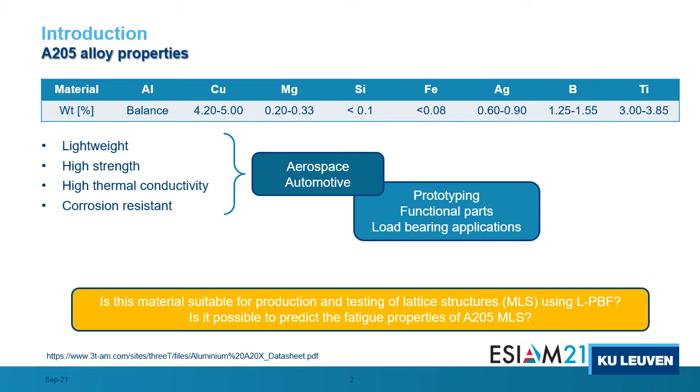For these reasons, the content of the presentation will be organized in two parts. First of all, we are going to explore the parameter optimizations for sample production of the metal lattice structures that we use in this investigation. And in a second stage, we are going to explore the fatigue life prediction and the fatigue experimental campaigns that we conducted on the coupons. At the end, we are going to wrap up with some conclusions.

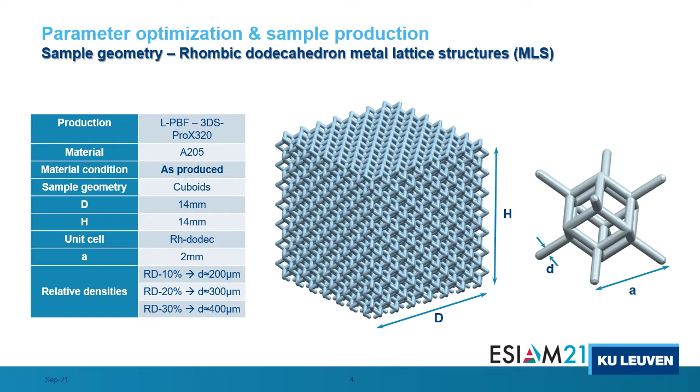The samples used in these investigations were produced on a 3D Systems Pro X 320 machine. They are composed of rhombic dodecahedron unit cells that were replicated to fill the volume of a cube of 14 millimeters of side. The rhombic dodecahedron unit cell is a bending-dominated unit cell composed of 32 struts connected by 8 nodes. We investigated 3 different relative densities, namely 10%, 20%, and 30%, by changing the strut diameters from 200 microns for 10% relative density up to 400 microns for 30%.

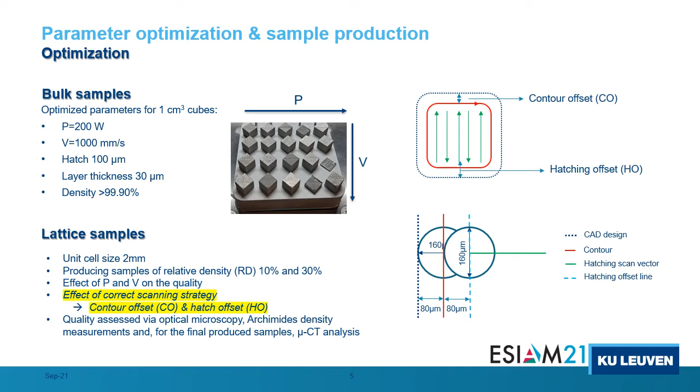The optimization process has been performed for 2 different relative densities, namely 10% and 30%. We started from the optimal parameter set for bulk coupons and we investigated the effect of the laser power and velocity on the metal lattice structure parts. Moreover, in order to produce lattice structures that are closer to the CAD geometry, 2 scanning strategy parameters were investigated, namely the contour offset and the hatch offset.

The main results of the parameter optimization process are presented in these pictures. On the left side, the first trials are presented. For these coupons, we used high laser power and velocity. The resulting quality is very poor, with severe dross formation affecting the outer surface of the struts. Moreover, looking at 30% coupons from the side, it is almost impossible to clearly distinguish a strut.

On the right side, the coupons produced with the optimal parameter set are presented. In this case, the overall quality of the parts improved with a substantial reduction of the dross formation and of the molten particles on the strut surface. However, top view and side view show different strut thickness, indicating that the struts are slightly elongated along the building direction.

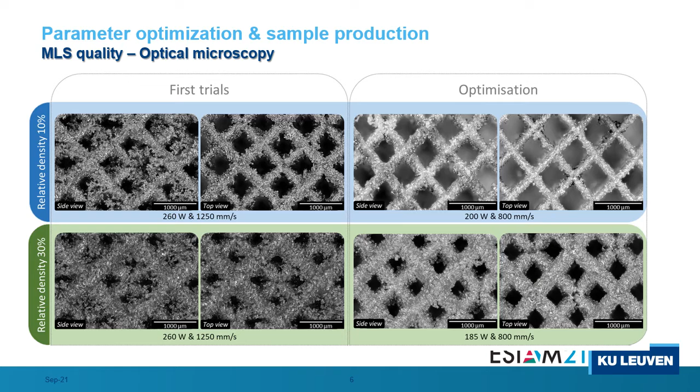The optimum parameter set presented in the table in the middle of this slide was used to produce 95 coupons with 3 different relative densities. After production, the coupons were removed from the base plate and cleaned using an ultrasonic bath.

In the bottom table, the measured relative densities are compared to the designed ones. The RD10 specimens are very close to the design geometry, but these measurements start to deviate when going to higher relative densities. This is likely due to the large effect of the partially molten particles on the RD10 structural relative density. The internal porosity of these structures is also investigated using both Archimedes and micro-CT analysis. And it can be noticed that for increasing design relative density, more and more defects are present in our structures.

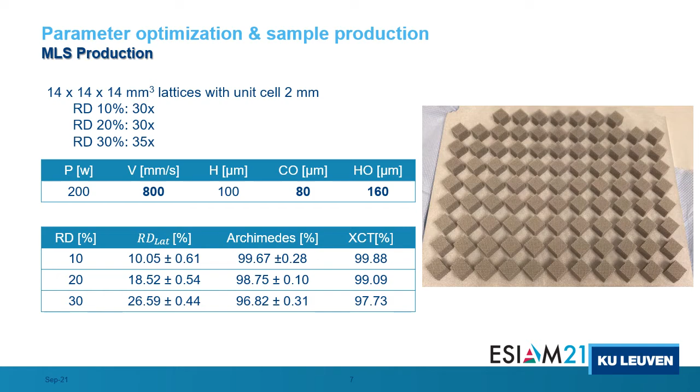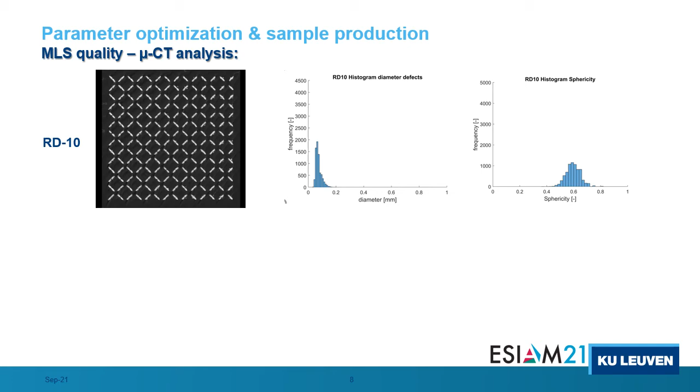The CT scans allowed us to take a closer look at the defect populations generated during the manufacturing process. For RD10 coupons, it is possible to distinguish well-defined struts with a very limited amount of internal residual porosity. These internal defects are very small and spherical, indicating that these pores consist of entrapped gas in the material.

For RD30 coupons, there are clearly larger internal defects, both at the node locations and along the struts. These defects have low sphericity, meaning that they can be classified as lack of fusion pores. The presence of these defects can be explained considering the scanning strategies adopted for RD10 and RD30 coupons.

For RD10, the scanning strategy consists only of one contour track. For RD30, the scanning strategy consists of a contour track followed by short infill tracks. These infill tracks are too short to result in a fully developed melt pool with the current parameter set, and so defects are generated.

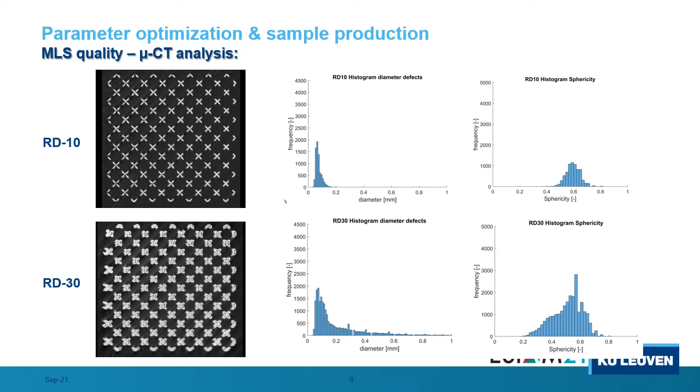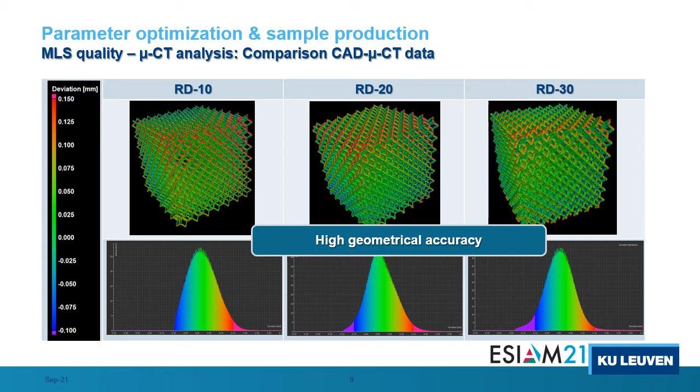Apart from the slight increase in internal porosity of RD30 coupons and these small geometrical deviations, we can conclude that we achieved our goal of building accurate, high-quality lattice structures with this aluminum alloy. Let's now move to the experimental campaign and the fatigue life prediction.

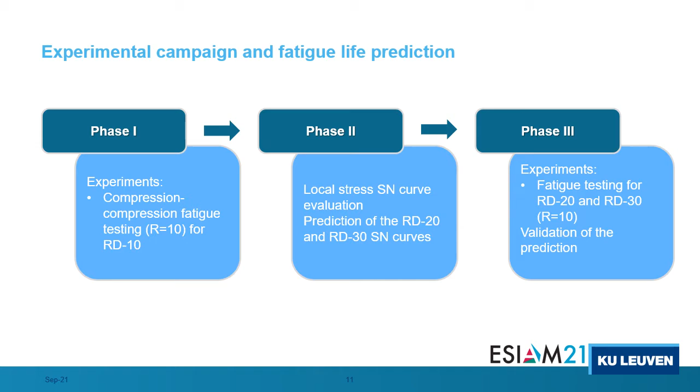The experimental campaign and fatigue life prediction consist of three phases. In the first phase, we carried out experiments on the coupons with a relative density of 10%. The experiments were compression-compression fatigue tests with an R ratio of 10. In a second phase, we extract a local SN curve that we use to predict the RD20 and RD30 SN curves. In a third phase, we carried out the same experiments on RD20 and RD30 coupons, trying to validate the predictions that we made in phase 2.

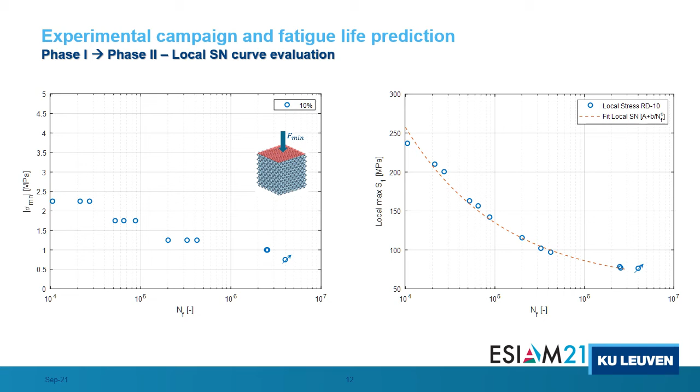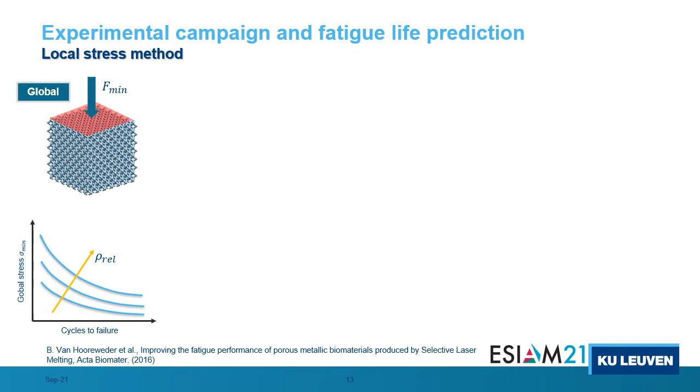In order to clarify the concept of local SN curve, it is important to introduce the local stress method. When we look at fatigue performances of metal lattice structures, we can do it from two different points of view. The global point of view treats stresses as a ratio between the forces and the cross-section of the coupons. Given the same global stress, the more the material, the higher the fatigue resistance. Therefore, SN curves are strictly related to the coupon's relative density.

But if we look locally, the external compressive stresses generate local bending and compression stresses along each strut. The struts, in this case, can be seen as clamped beams subjected to an inclined force that generates tensile and compressive stresses across the strut's cross-section. For fatigue problems, the local tensile stresses can be considered as the main driving factor for fatigue crack initiation.

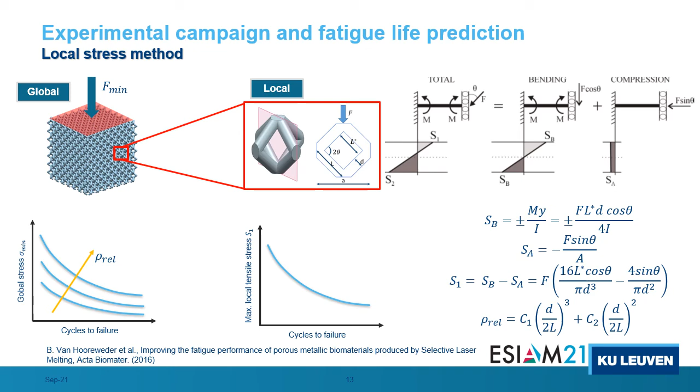Considering the Gibson-Ashby relation between the strut diameter and the metal lattice structure relative density, it is possible to obtain a single SN curve that is not influenced by the relative density, but only by the material condition and by the surface condition of the coupons.

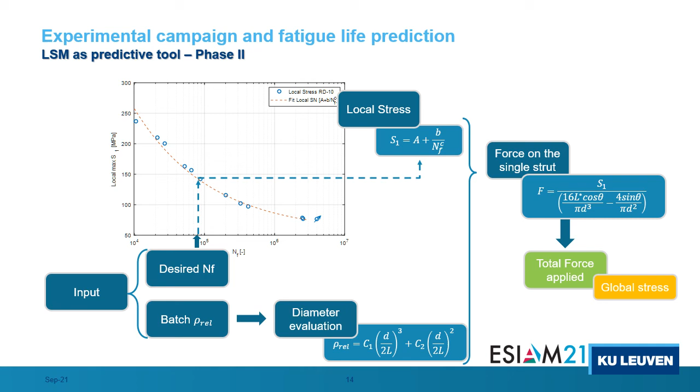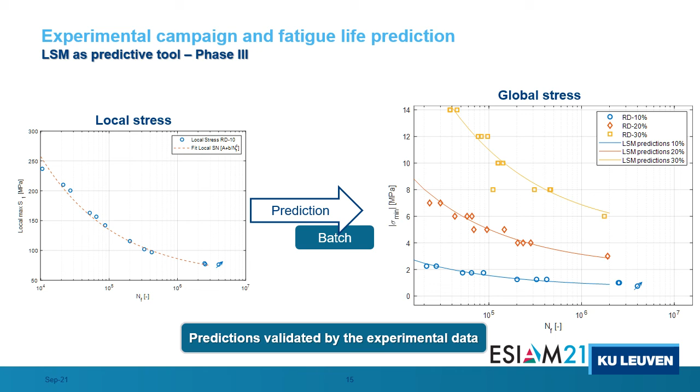Comparing the fatigue test results with the fatigue predictions, it is possible to appreciate how well the local stress approach can estimate the fatigue life of the metal lattice structures investigated in this study. This methodology could be extended to other metal lattice structures with different unit cells and produced with different materials to extract the structural fatigue life with a limited amount of coupons, saving time and money.

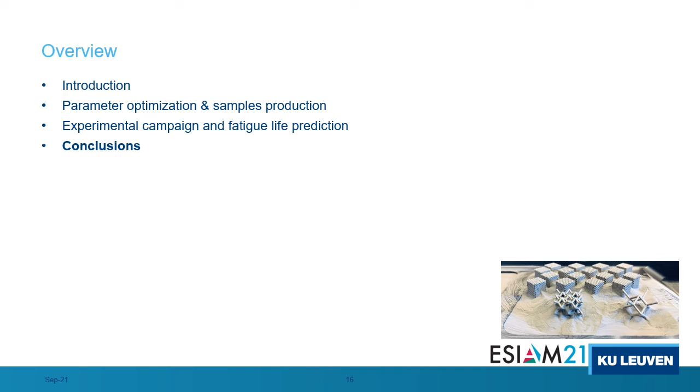To conclude this talk, it is possible to summarize the main findings of this study as follows. A quasi-optimal parameter set for production of metal lattice structures with the A205 was obtained. Although this parameter set ensured high geometrical accuracy, improvements are still required to reduce the amount of internal defects that were generated for the coupons with higher relative densities.

A methodology based on the local stress method has been proposed to predict the fatigue performances of the metal lattice structures. The procedure consists of one single set of SN data that is then converted into a local SN curve. This local SN curve has been successfully used to predict fatigue performances of the metal lattice structures investigated in the study. In fact, the comparison between the predictions and the experiments showed high correlation, highlighting the prediction capabilities of the local stress approach.